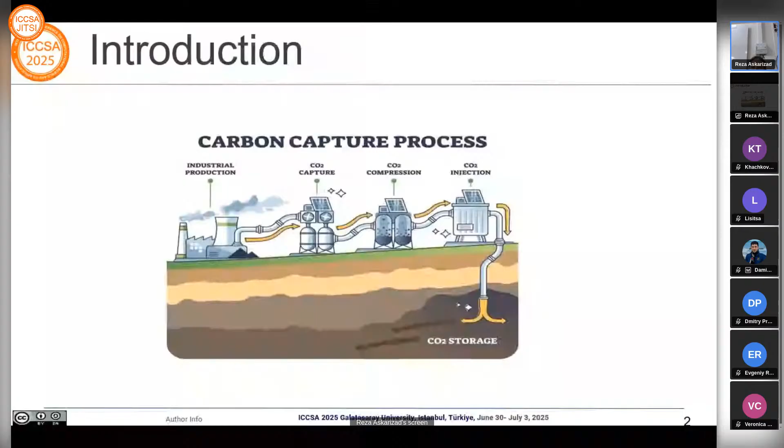...to reduce the CO2 we emit into the atmosphere. Once injected into the subsurface, it will lead to a series of physical responses. It will form a gas saturation plume, and physical properties such as density and seismic velocities change.

We need to monitor this process in order to ensure that injection is safe, to determine the initial pressure and location of the injection.

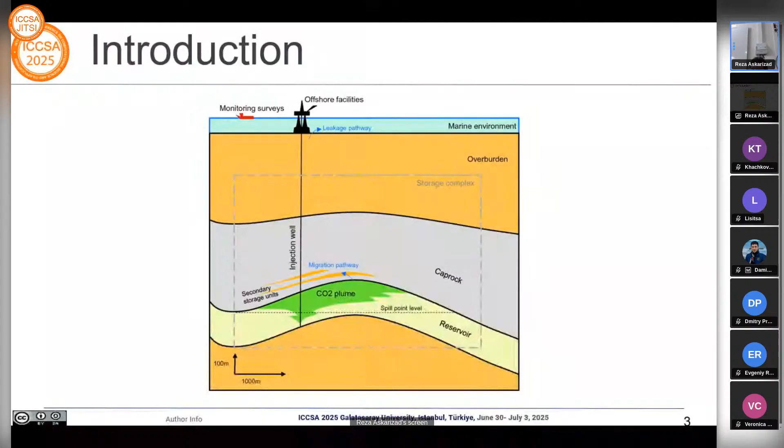Numerical simulations such as multi-phase flow in porous media and seismic modeling are the essential tools for solving the CO2 storage problem. This is necessary to predict storage capacity and assess the long-term risk arising from fault activation and well-bore leakage. However, it is very...

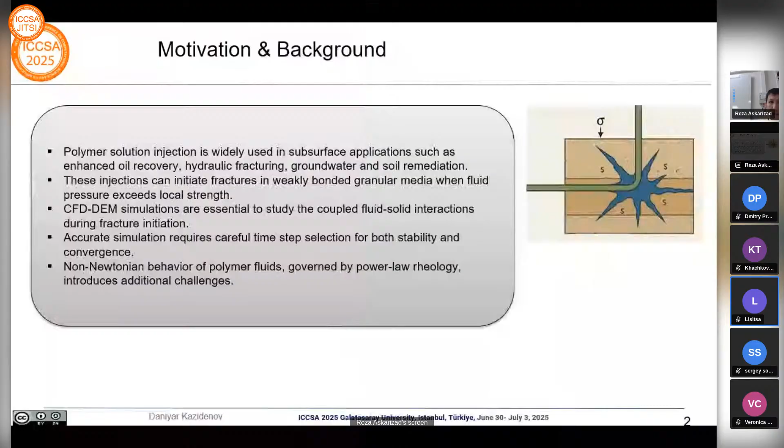This work is based on our previous study on fracture initiation, where we investigated the physical fracture initiation mechanisms.

Here, specifically, we focus on how power law parameters of non-Newtonian fluids affect fracture initiation and morphology, injection pressure evolution, and time step sensitivity.

First, I will describe the numerical model formulation, then show some numerical settings, present key results, and finalize with main conclusions.

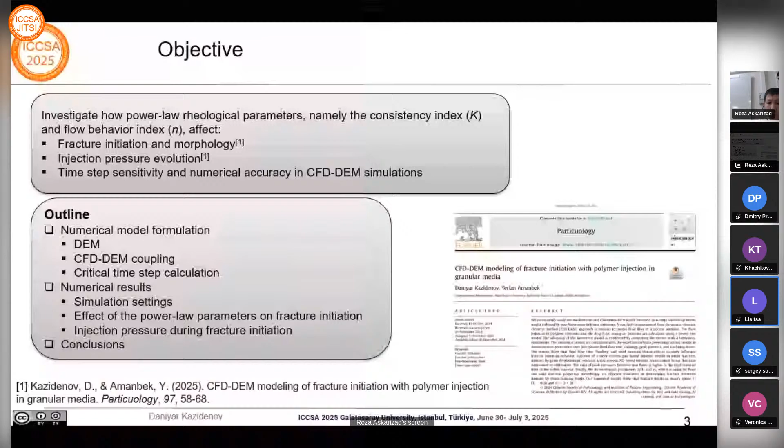In our study, we represent the rock formation as a porous granular medium containing many individual particles, and these particles are simulated using the discrete element method.

In the discrete element method, the motion of the particles is governed by Newton's second law, and the interaction between particles is described by the Johnson-Kendall-Roberts model for weak cohesive contact forces.

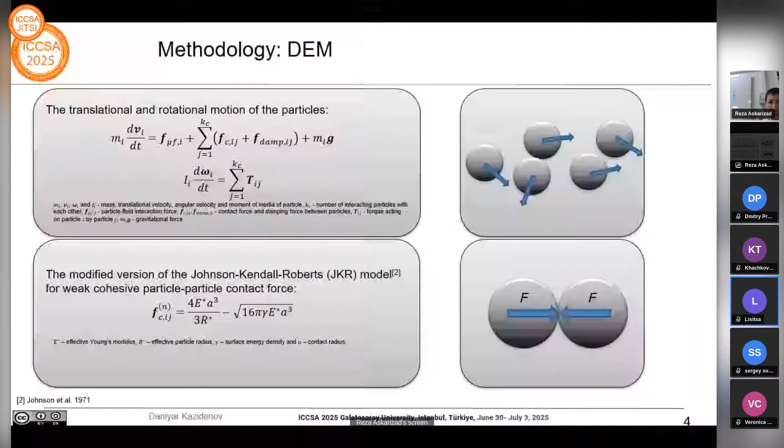Fluid flow in porous media is described by locally averaged Navier-Stokes equations. The total particle-fluid interaction force is the sum of all forces acting on a single particle from the surrounding fluid.

The dominant component of that interaction is a drag force, and that drag force is specifically adapted for power law non-Newtonian fluids in our study. Fanning friction and particle Reynolds number contain power law rheological parameters, which relate the fluid rheology to the momentum exchange with the particle.

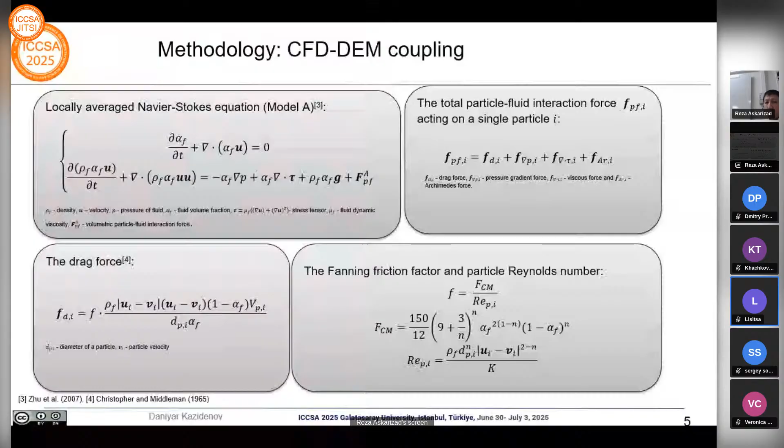In our study, we use separate methodologies to calculate the time step for the solid phase and fluid phase. In the solid phase, we use the Rayleigh time step criterion, which is based on material parameters of the solid particles. For the CFD time step, we use...

...the Courant-Friedrichs-Lewy (CFL) condition and diffusive time step criterion. The diffusive time step criterion is specifically for the creeping flow regime, where Reynolds numbers are much lower than laminar flow. Usually in CFD and DEM, the solvers operate at different time steps, and the coupling interval shows the ratio between those time steps.

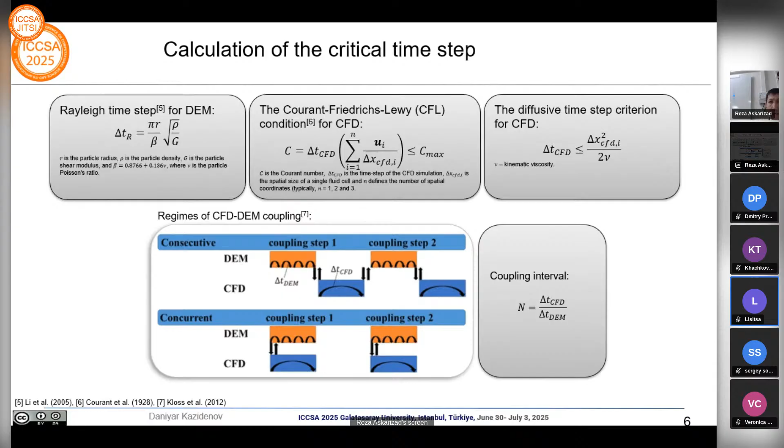The rheology of the injecting polymer solutions is described by the power law model, where the viscosity varies with shear rate, and is also influenced by the consistency index and flow behavior index. The consistency index shows the overall magnitude of the viscosity, and the flow behavior index shows how viscosity changes with shear rate.

For example, in Newtonian fluids like water, viscosity is constant, n equals 1 at any shear rate. When n is lower than 1, the regime is shear thinning behavior, and viscosity decreases with increasing shear rate, which is the objective of our study. When n is higher than 1, the regime is shear thickening, and viscosity increases with increasing shear rate.

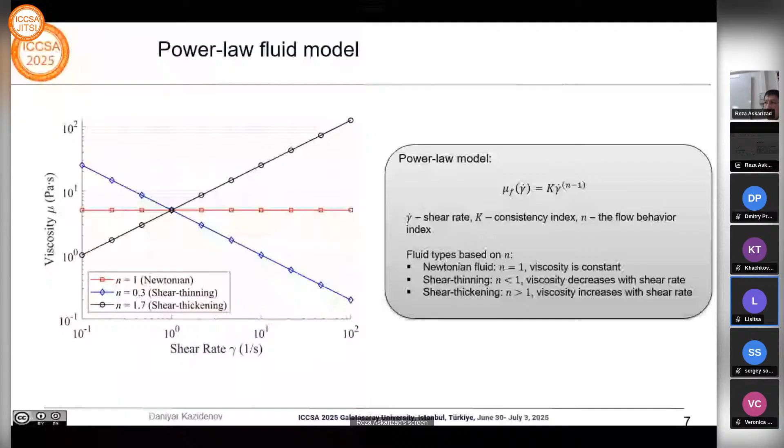Here we use 5 different consistency indices from 1 to 5, and each consistency index has 3 flow behavior indices, so total simulation cases are 15.

We use a total of 15 simulation cases, and the discrete element time step is the same for all cases, calculated based on the Rayleigh time step criterion. For analysis, we use 2 CFD time step cases, 10^-5 and 10^-4, with coupling numbers 1 and 10 respectively.

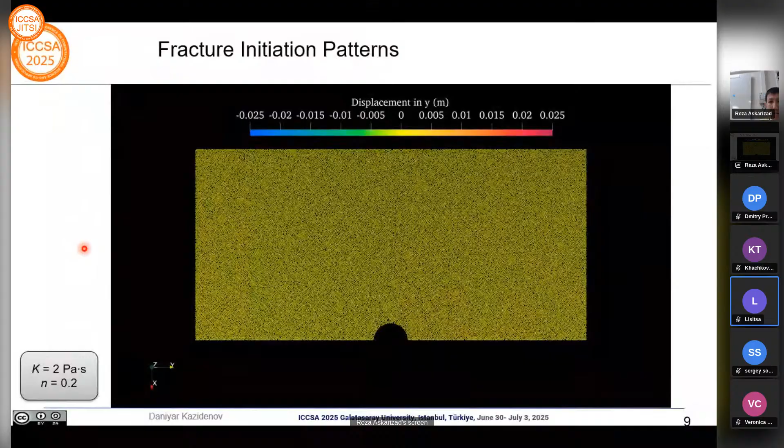This slide shows the snapshots of the fracture propagation cases, specifically the main fracture propagation cases.

At flow behavior index 0.2, consistency index 1 doesn't create any fracture, and fluid infiltrates into the surrounding medium here. At K of 2, there is a linear orientation of the fracture, which is perpendicular to the lower applied stress. K of 5 shows a radial pattern, which is independent of the stress.

When we increase the flow behavior index to 0.3, K1 shows two linear fractures, and K2 changes from linear to radial fracture, while K5 still remains in radial fracture, but with a larger fracture surface.

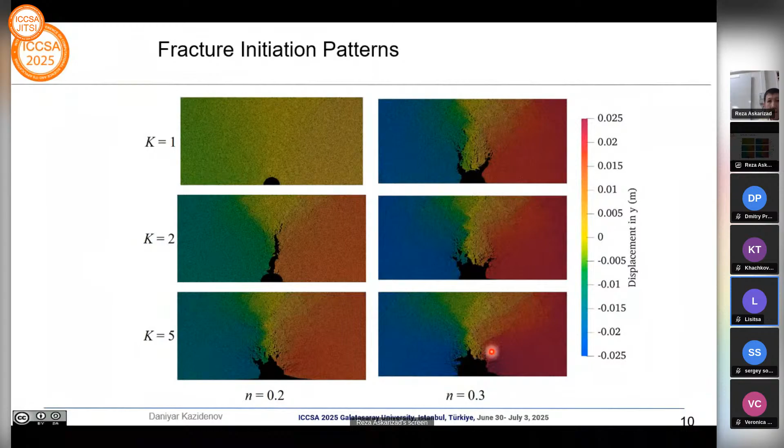At higher consistency index, velocity is lower within the fracture, and the fluid affects the particles uniformly and exceeds the stress applied from the sides, so the fracture behaves in a radial pattern.

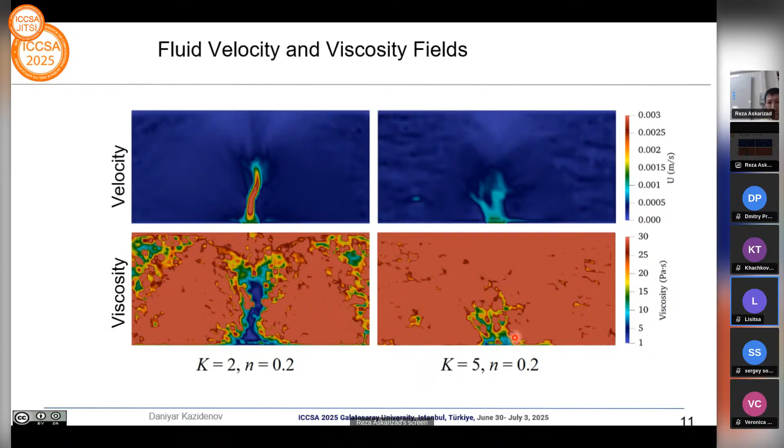For example, a rapid decrease in pressure corresponds to higher fracture opening, a gradual decrease corresponds to moderate opening, and stable pressure evolution with time indicates there is no fracture at all.

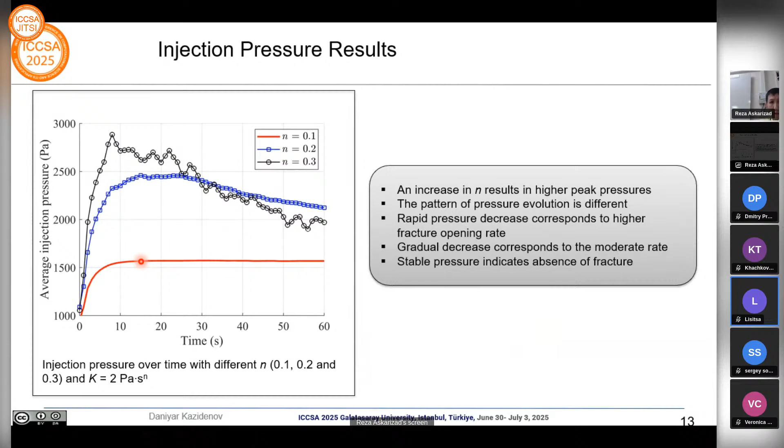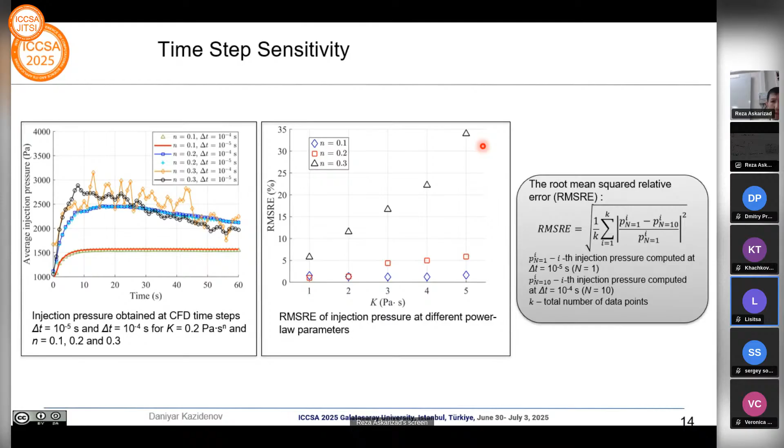Here are our main conclusions. Let's summarize: fracture morphology depends on fluid rheology.

Low viscosity leads to linear fractures, while high viscosity results in radial fractures. Flow behavior index has a stronger impact on time step sensitivity than consistency index.

Simulations with lower flow behavior index show accurate results even at higher time steps, but higher flow behavior indices require a smaller time step for reliable results.

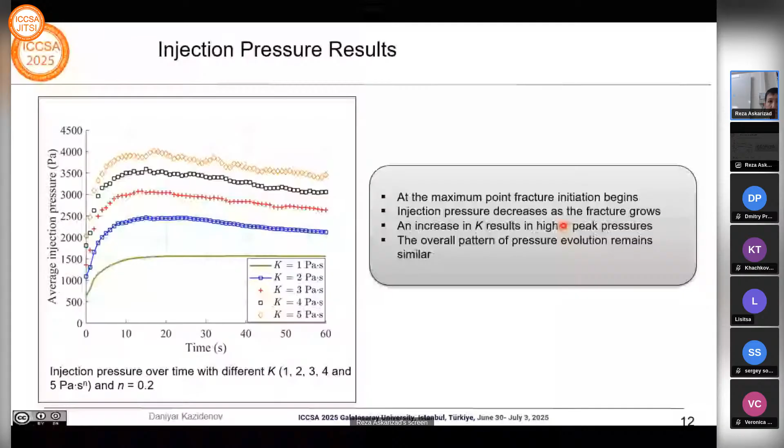Usually anisotropic stress conditions are applied. For example, if you apply the same boundary conditions, the fracture propagation is still radial even at lower consistency indexes, so we don't see the linear propagation. That's why we applied different conditions—we observe different stress conditions.

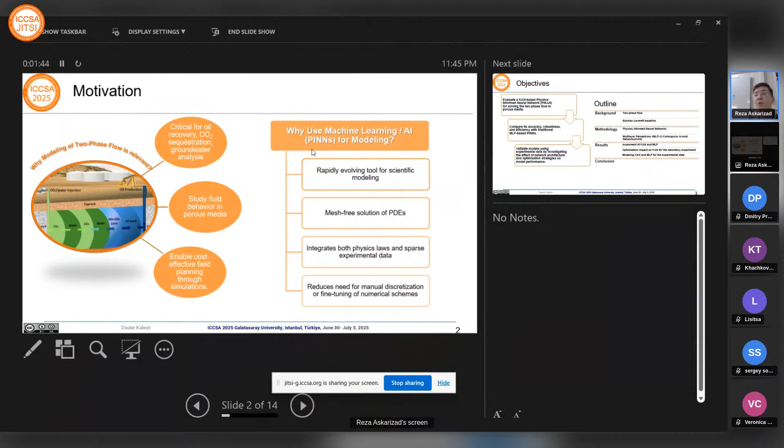That's where physics-informed neural networks, or PINNs, come in, offering a mesh-free and data-driven way to solve this kind of equation by enforcing the partial differential equations directly into the loss function of the neural network.

Our objective in this research is to explore the effectiveness of the newly introduced Kolmogorov-Arnold network within the PINNs framework to model two-phase flow in porous media. Specifically, we aim to solve the Buckley-Leverett equation using both the Kolmogorov-Arnold network and the MLP-based PINNs, and compare the performance of both architectures in terms of accuracy, training efficiency, and generalization.

To evaluate this, we use experimental data involving fluid dynamics. We also investigate how different architectures and training strategies affect the performance of our newly introduced network. Ultimately, our goal is to assess whether KAN is a more robust, interpretable alternative for modeling nonlinear partial differential equations in fluid dynamics.

Here's a short outline. We'll start with the background of two-phase flow and the Buckley-Leverett equation, then introduce our neural network architectures, examine the results, evaluate the performance of both models, and summarize our findings.

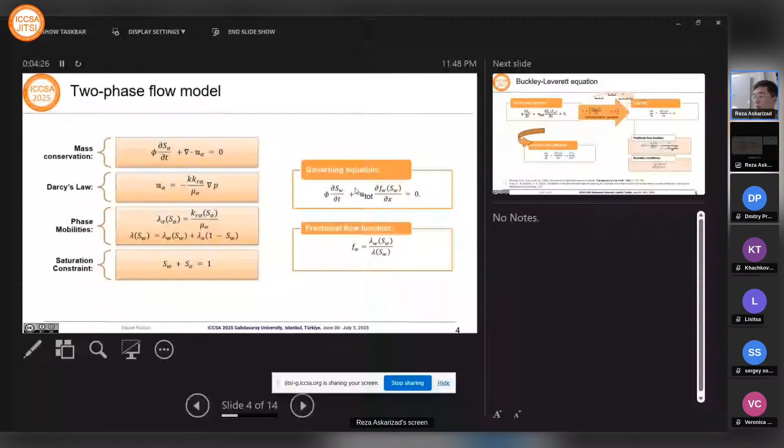For this Buckley-Leverett equation, we introduced dimensionless variables and made substitutions to normalize it and make it suitable for further analysis, with the fractional flow function in the non-convex case, since the non-convex case describes more complex fluid behavior. We applied the following boundary and initial conditions, and for the final PDE we incorporated a diffusion term, as proposed in prior studies by Olga Fuchs.

Next I'll introduce the neural network itself. The idea of physics-informed neural networks is that the network approximates our solution with trainable parameters under an enforced loss function consisting of two composite loss functions: the first ensures the neural network fits the data of the boundary and initial conditions, and the second enforces the partial differential equation itself.

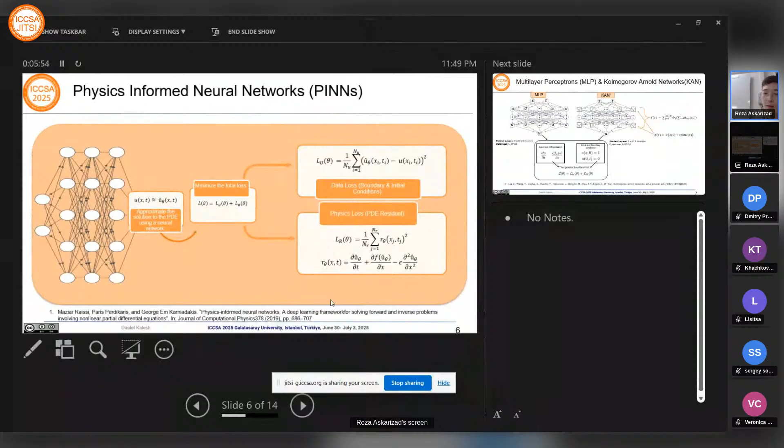This neural network was integrated with two different architectures. The first is the MLP, a standard fully connected feed-forward neural network. It is widely used and applies simple linear transformations with non-linear activation functions.

The second uses another principle, based on the Kolmogorov-Arnold representation theorem, fitting the data not through neurons but through splines. It uses activation functions that adjust the spline, the biases, and the weights. The difference is that the multi-layer perceptron uses fixed activation functions, while KAN uses learnable activation functions, which change over training.

We adjusted the following setups for both architectures, and here we present the results.

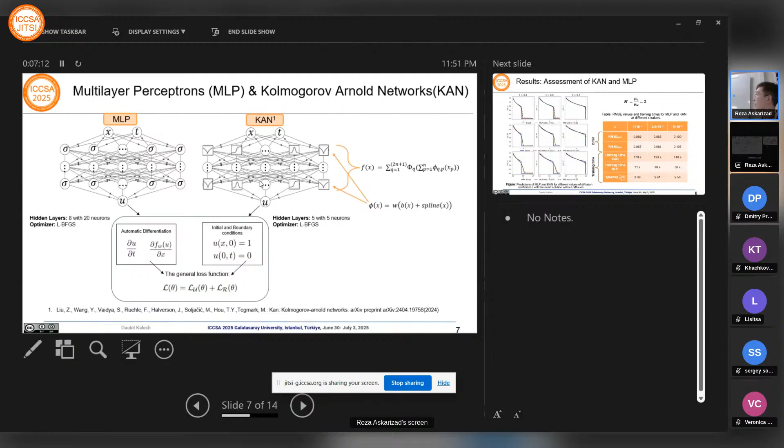To verify our models, we compared them with the analytical solution of the Buckley-Leverett equation. As you can see in the figures, both architectures closely match the exact solution. We also adjusted the mobility ratio of viscosities for this case, then numerically compared them using root mean square error as the metric, along with training time. The accuracies of both neural networks are similarly close; however, the training time shows that MLP is twice as fast as KAN.

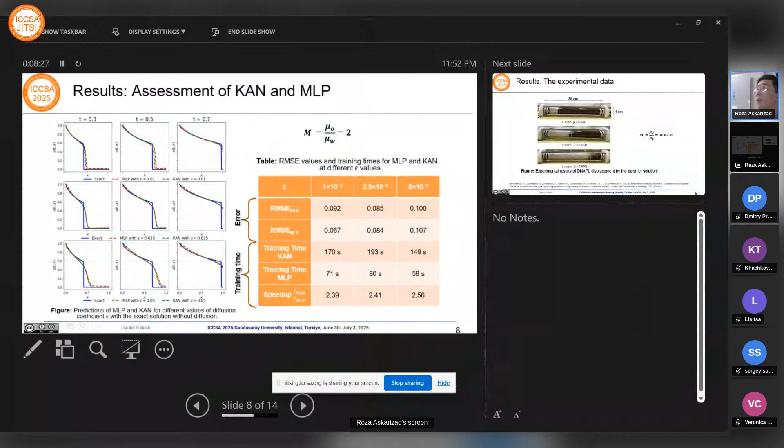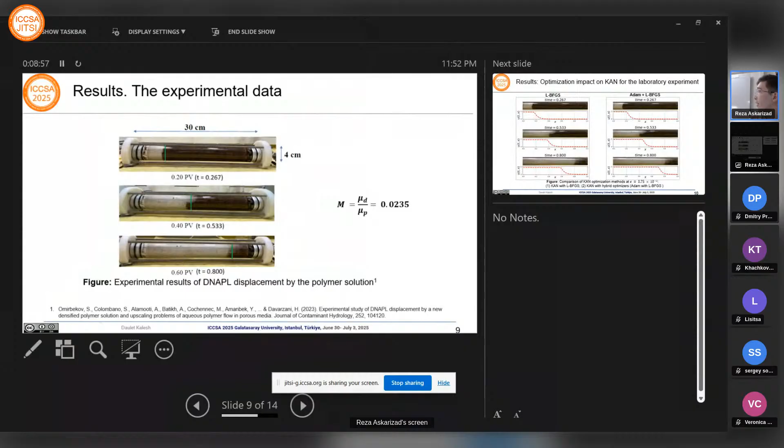In this slide you can see that we used the following validation to see how different optimization techniques impact the performance of our Kolmogorov-Arnold network. As you see, using only one optimizer fits perfectly for the first time step, but when we made the hybrid optimization strategy, it improves our prediction, closely matching for each case.

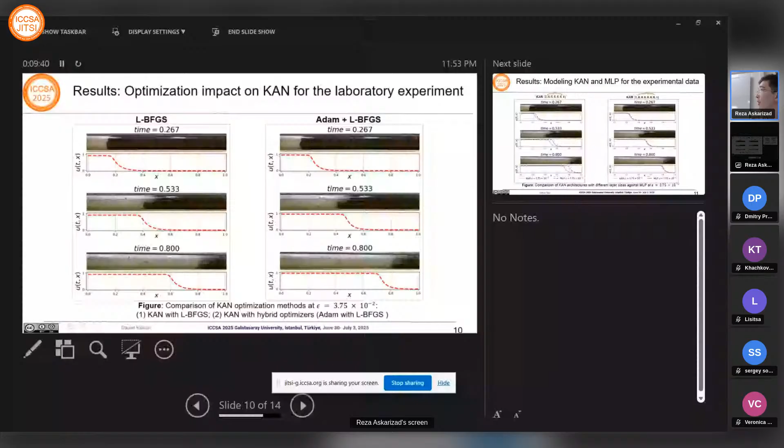So by using this hybrid optimization, we made the following analysis validation. We compared how the depth of the architecture impacts the performance of the KAN.

Even in this depth architecture, the neural network predicts well, but compared to MLP, it has a slightly bigger deviation. Then we added a new layer and increased the depth of the neurons in each layer. As you see, it perfectly matches all the results.

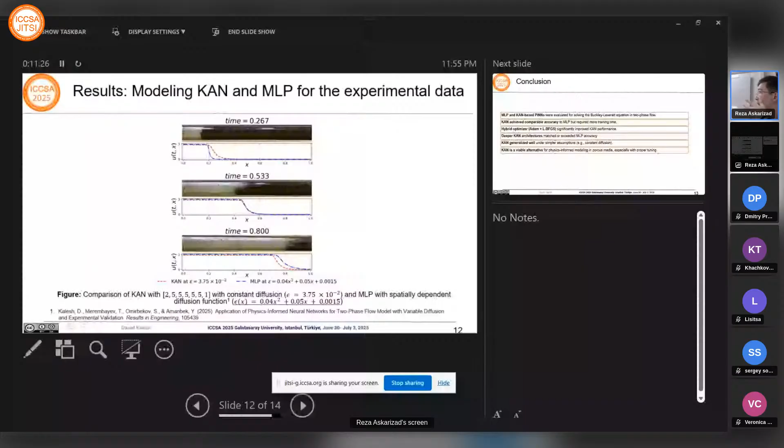To summarize, we evaluated the KAN model and performed it. We successfully implemented it for the two-phase flow model. As you see, KAN achieved comparable results, however it required more training time, and this hybrid optimization technique also improved our KAN performance. The deeper KAN architecture also improved and matched MLP's accuracy.

To sum up, we can say that KAN is a viable alternative to use for modeling two-phase flow in porous media. That's all, thank you for your attention. I'm happy to take any questions.

Thank you, we have time for questions. Are there any? Are you restoring the one-dimensional solution? Yes, yes. Okay, and how did you choose the function of relative permeability?

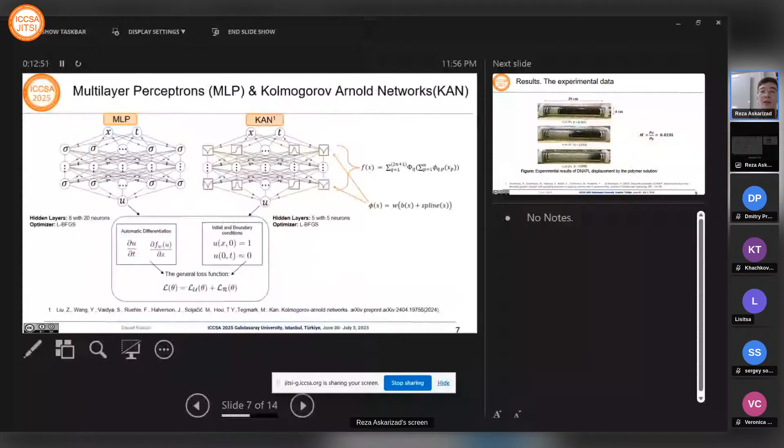Yes, I think he's solving the Buckley-Leverett, which has dimensions, so certain terms will cancel. But still, it's squared, so it's like... Any other questions? Non-convex. Any other questions from the audience, the online audience?

Okay. Okay, thank you. Thank you.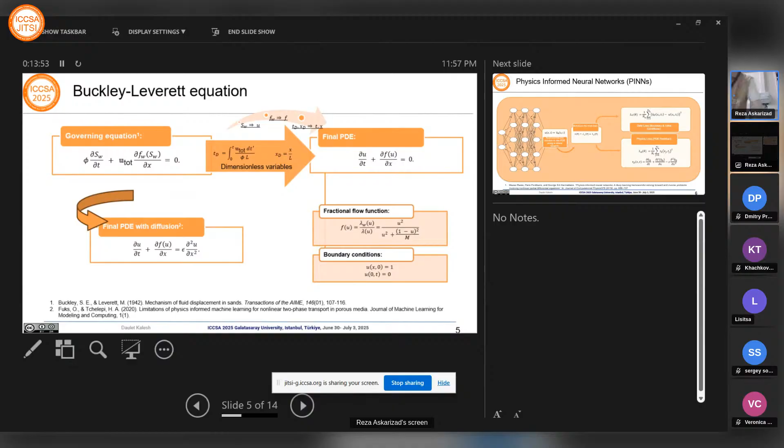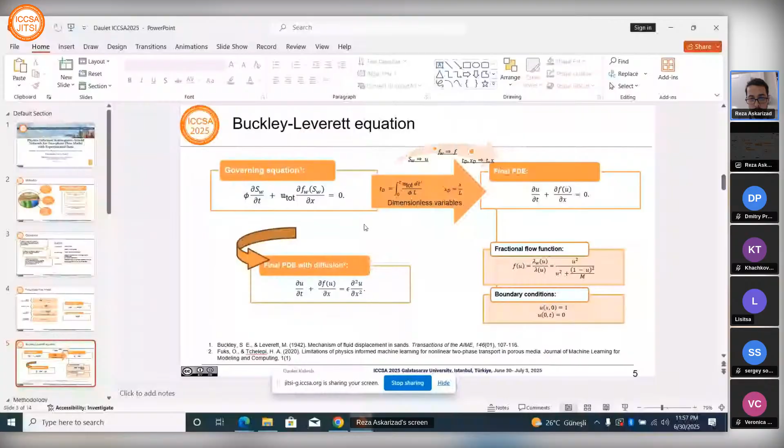So I think it's time to try, just to be sure that we'll see. Yeah, at least we can see the PowerPoint. Do you hear me? Yeah, we can see your full screen mode, so it works nicely.

Okay, so hello everyone. Today I'm going to tell you about multi-GPU implementation of the numerical algorithm enhancing discrete element modeling performance. First, let me briefly tell you about the type of problem to be solved.

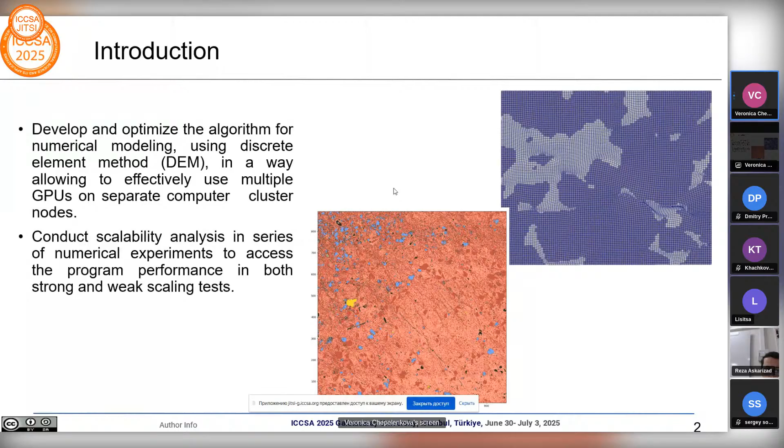But DEM simulations are computationally intensive, so our goal here was to develop an efficient algorithm based on using GPUs on distributed memory systems and to measure its performance in strong and weak scaling tests.

In DEM, the sample is regarded not as a continuous medium, but as a set of small particles interacting with elastic and friction forces, which can be represented as a system of springs connecting each two particles. To calculate the elastic force in normal direction, particles are allowed to overlap so that the difference between their initial and current overlap length is used in a Hooke's law as shown here.

The friction force is calculated using the incremental representation of relative tangential displacement. It should be noted that some particles are considered as bonded, and there exists a critical length which breaks the bond if exceeded.

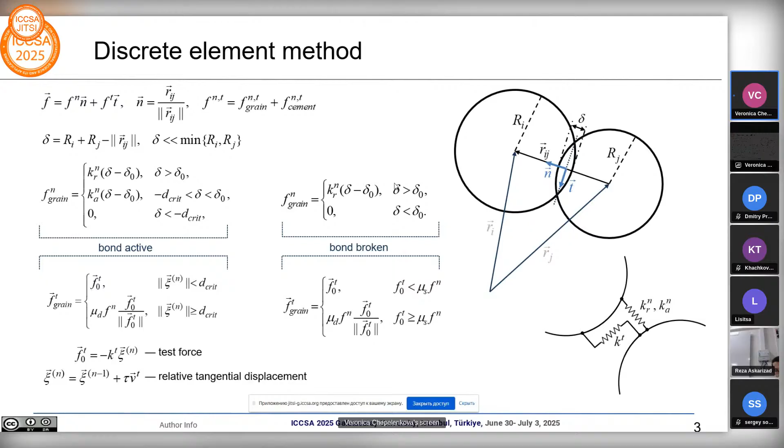So basically, we have Newtonian equations of motion for each particle, where the gravity force is neglected, and the interactive pairwise force is calculated among a specific subset of particles, J of I. To solve this equation, the velocity-Verlet finite difference scheme was used.

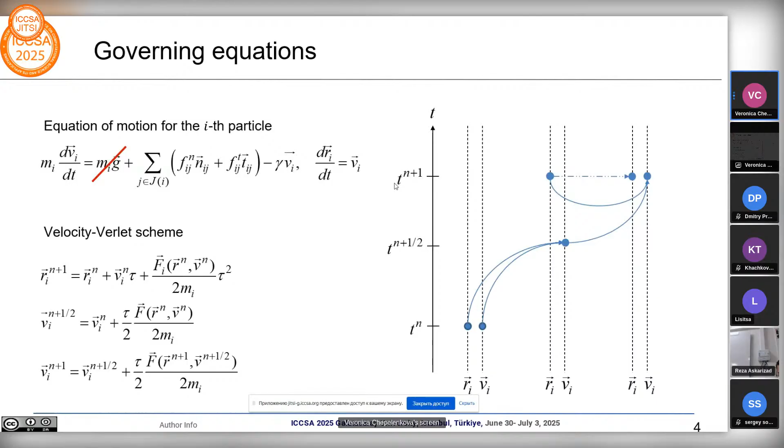Now, more on the subset of interacting particles. The most straightforward way to calculate forces of particle interaction is to sum up the forces for each possible pair of them, which sounds extremely inefficient and can be easily optimized knowing that most of the particles do not interact since they are too far from each other.

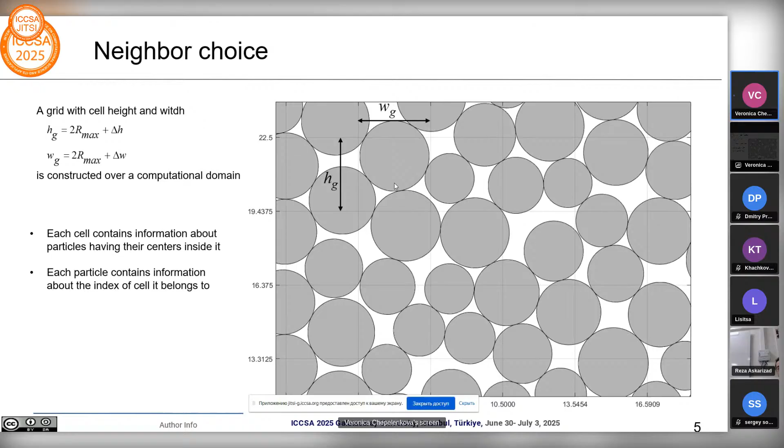To narrow down the area where forces are relevant, we construct a grid over a computational domain with its cell size chosen in such a way that at least one particle can fit into it. Now we assume that each cell knows about the particles lying inside it, and particles know the index of the cell they belong to. By doing that, we can define a subset of particles by picking all the ones inside 9 cells surrounding the particle of interest, including the cell it is lying at. This approach can significantly decrease the amount of interactions to be calculated.

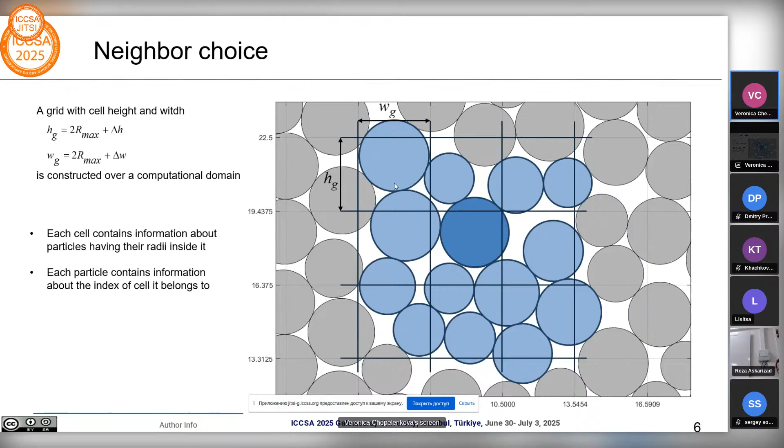Next, about bonded particles. Let's say a pair of particles is defined as bonded if, after a packing stage, they end up being overlapped. This is an important definition since bonded particles interact with each other not only in a repulsive but also in an attractive way, as if there was some kind of cemented material gluing them together.

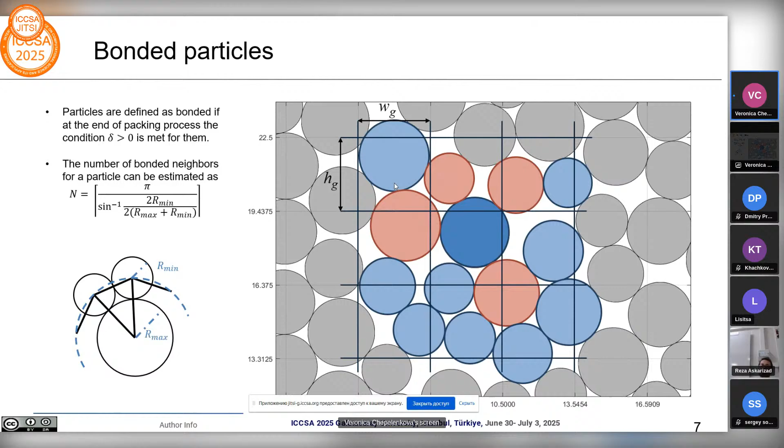Now for the packing stage. Here, the Poisson disk sampling algorithm is used to fill a given domain with uniformly distributed points, which are placed no closer than at a certain distance from each other. After that step, the radius within a given range is assigned to each point, and from now on, the Lubachevsky-Stillinger algorithm starts working.

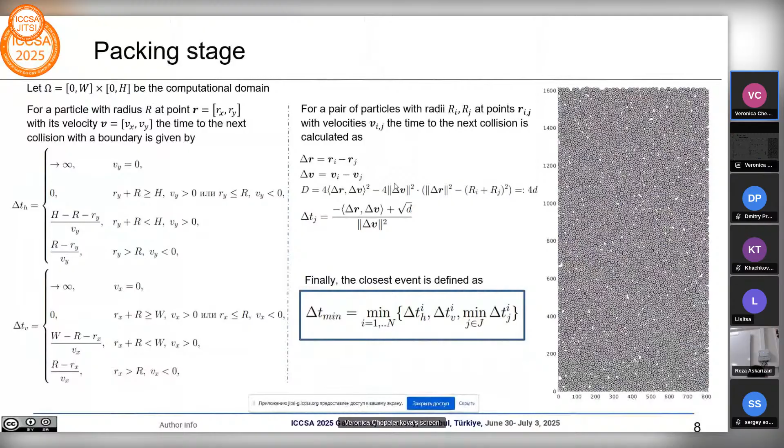The next and final stage is uniaxial loading, and here we apply a finite stress to the sample and measure its average stress and strain to use for calculating effective elastic properties.

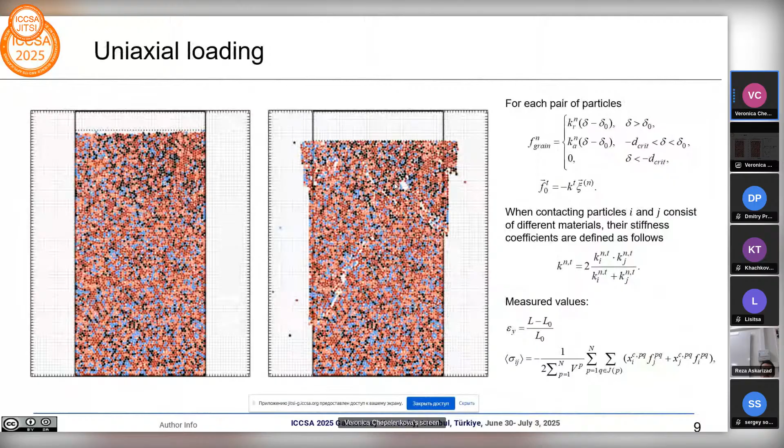And the core problem is how to pack the structure to correctly transfer it. Casting it directly to an array of bytes is incorrect, as we will send only pointers and not the underlying data, which means the data will be lost and pointers will be invalidated because they are moved to another memory space, which can be either VRAM or RAM of another cluster node.

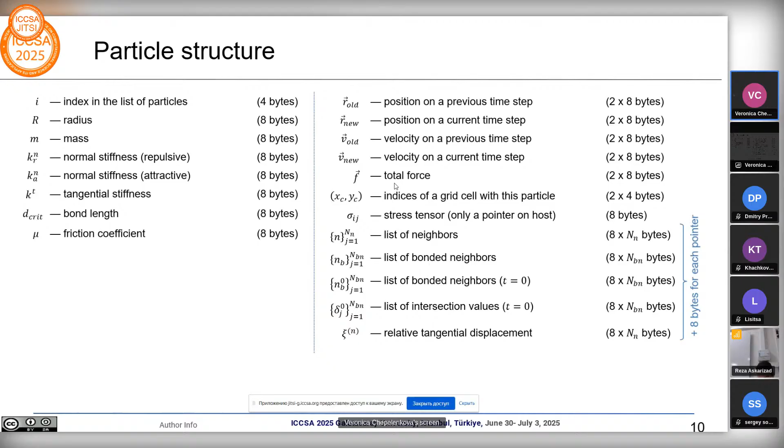Sending structure fields one by one will give correct results, but has extremely high computational cost, since calling transfer functions is an expensive operation and thus should be used as rarely as possible. So we've chosen to serialize data, meaning converting it to an array of bytes, not with general casting, but with placing inner arrays directly into a byte sequence to be sent.

The total list of particles can now be represented as a sequence of each particle's byte stream. The process of deserialization is performed in a similar way. This allows us to call a transfer function only once, thus reducing the computational cost.

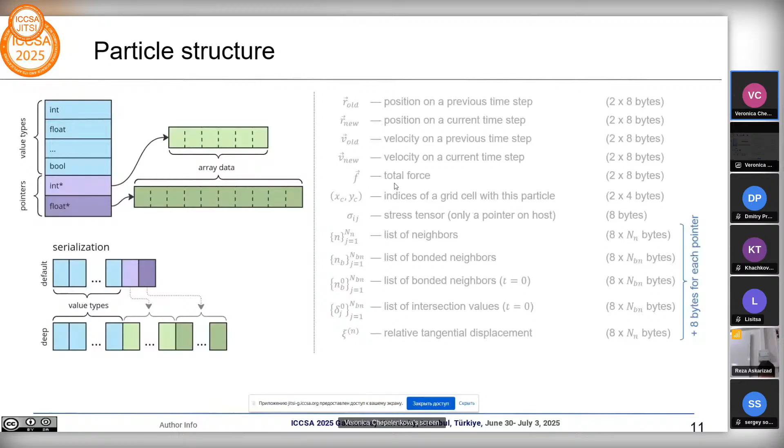So, to use our algorithm for distributed memory systems, we divide a computational domain into subdomains, each assigned to a corresponding MPI process. Since the trajectory of each particle depends on the others, we have to add so-called halo cells, which are cells received from an adjacent process at each time step.

The first situation is when the particle moves into the process and should from now on be handled by it. To do so, the process receives not only the particles in halo cells, but also the set of indices moved from an adjacent process to the one of interest. They are now added to the list of all particles in this process and assigned to a corresponding cell of the first or last row of the grid.

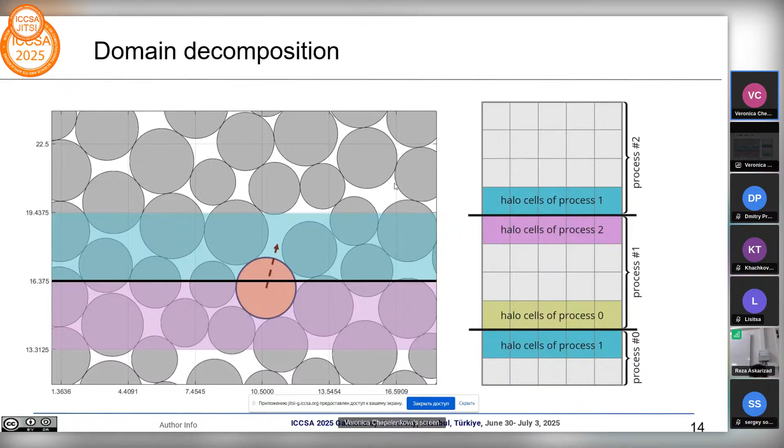Similarly, if the particle leaves the subdomain, the process sends the array containing particles in its first or last row, along with the array of indices of particles that should now be handled by another process. These particles should then be deleted from the list in this process so that calculations are not doubled. So the overall algorithm for each process at each time step is as follows.

First, we calculate new positions for particles in the first and/or last rows of the grid. Then we fill the arrays of indices of particles moved to another process. That gives us one array for each boundary, which is 1 or 2 in total.

Then we serialize data and perform data transfer from VRAM to RAM. Next, we send the first and/or last row of the grid to a corresponding process, and at the same time receive updated halo cells from the adjacent process.

Now, if there exist particles moved through the boundary, we send indices of particles moved to the other process and receive indices of particles moved from the other process. If there exist particles moved to the adjacent subdomain, we remove them from the list of particles in the current process. And if there exist particles moved into the current subdomain, we add them to the list of particles and set corresponding grid indices.

Now we transfer data back from RAM to VRAM and deserialize it. It is also worth noting that the block of exchanging data runs simultaneously with the basic calculations for the rest of the subdomain, thus hiding the time needed to perform preparations and transfers.

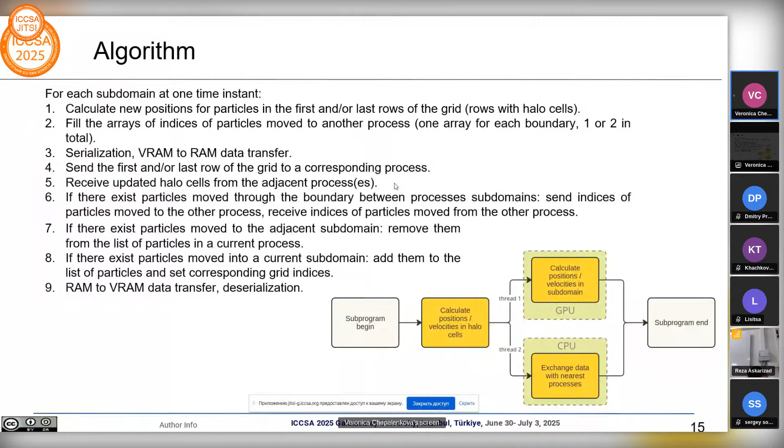Now for scalability analysis. Two types of tests were conducted to measure the performance of the algorithm. The first is the strong scaling test. Here we have a fixed domain containing 112,000 particles, distributed between 1, 2, 4, 8, and 16 processes. Efficiency is measured as the ratio of the time spent on one process to the time spent on n processes, divided by n.

The reason for this is the too small number of particles, since the more processes, the less calculations per process for the same amount of transferring.

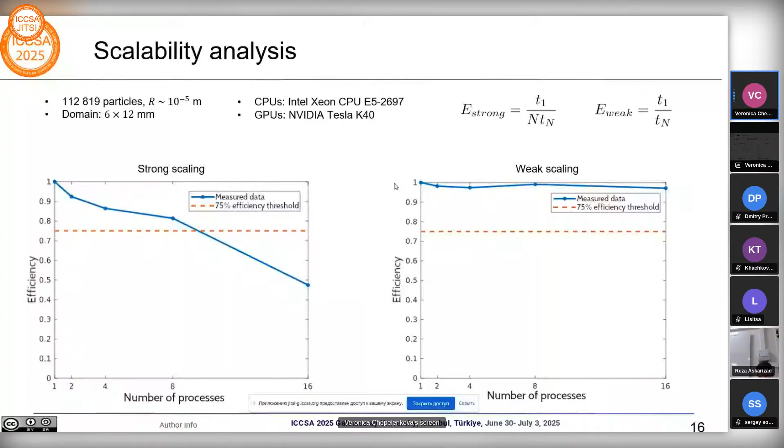To sum up all of the above, in this work we developed and implemented a numerical algorithm combining both CUDA and MPI for multi-GPU computations on multiple computer cluster nodes. This algorithm uses both GPU and CPU simultaneously to reduce the time of calculations. We also proposed a method to exchange information about particles moving through inter-process boundaries, and conducted numerical experiments for strong and weak scaling tests showing the efficiency of the implemented algorithm.

And that's all I wanted to say on this topic. Thanks for your attention.

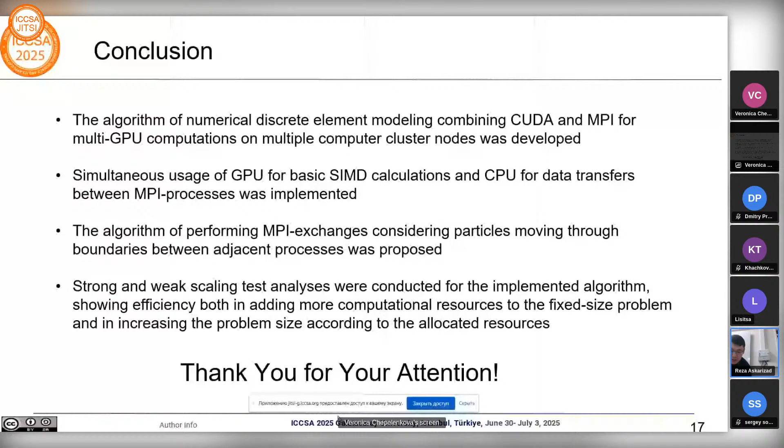Okay, thank you for your presentation. I was wondering, I saw this weak scaling part, it's hard to reach this. I was wondering about the speed up. Have you considered comparing CPU computation versus multi-GPU computation, like traditional CPU versus this new model with your CUDA implementation? Oh, I did not perform these tests.

Okay, so then another question is, hopefully it works faster, right? Yeah, sure.

Okay, I have some numerical questions. How do you deal with solving the unresolved discrete element method, which means in one cell you should have... you don't have this CFD, right? You have the purely...

That's good. And regarding this, you had this loading experimental work, right? Did you compare your CUDA implementation with the experimental results? We don't have any physical experiments on hand, so we've never compared it.

Okay, thank you. Okay, I think we can go to the next presentation. Okay, great.

My talk will be about solving the elastic problem by static simulation. This slide is about introduction: we want to solve the elastic problem in an inhomogeneous medium with not constant coefficient, the Lamé coefficient. To solve this, we use it in 2 dimensions. We use a rectangular mesh and finite difference approximation.

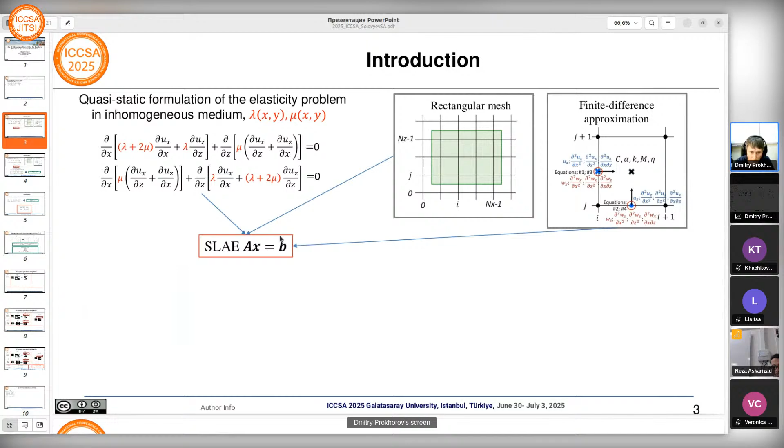How do we solve it? It's not a big problem. We use the conjugate gradient method, but the main issue is how to check, how to use the preconditioner - what preconditioner we should use.

In this work, we use the preconditioner A0 as the matrix from the elasticity problem in a homogeneous medium - the similar equation, but the coefficients are constant. In the next slide, we want to discuss how to solve this equation.

We use spectral decomposition to solve this equation. Why do we do it? Because we can use fast multiplications. We use spectral decomposition in 1D, and after that we construct the decomposition for 2D and use fast matrix multiplications to solve this problem very fast.

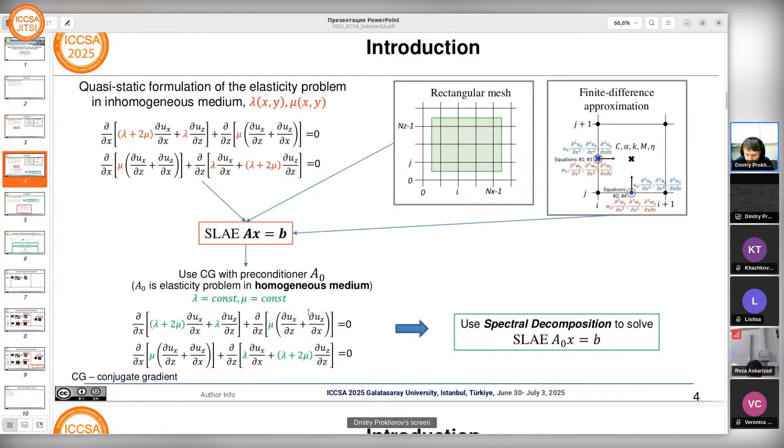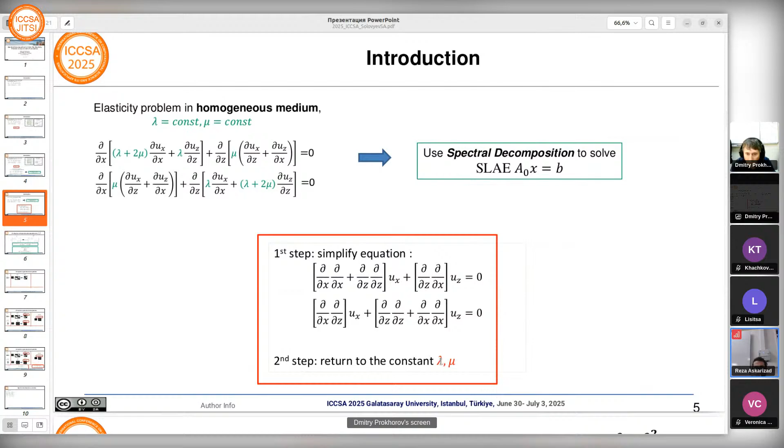Okay, the first step is to simplify these equations when we don't use the constants. The second step, we come back and return to the constants lambda and mu. We will start from the description of the first derivative, then move to the second, to the Laplace operator, and to the whole equation.

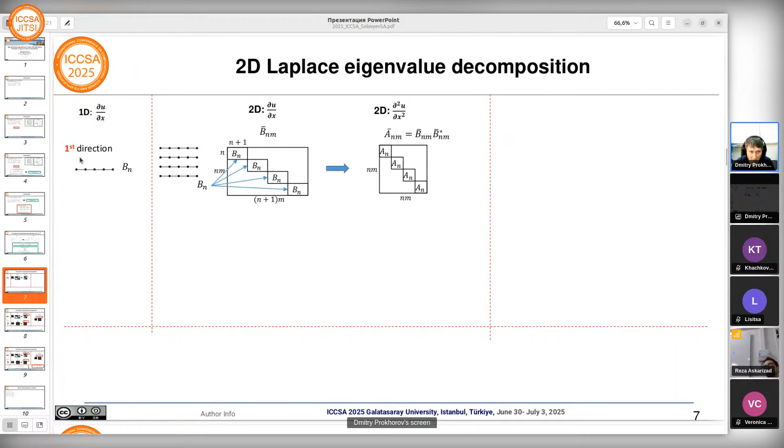Next step, we look at the second direction. The first derivative du by dz, and second by z2, and we can construct the Laplace operator from these two matrices.

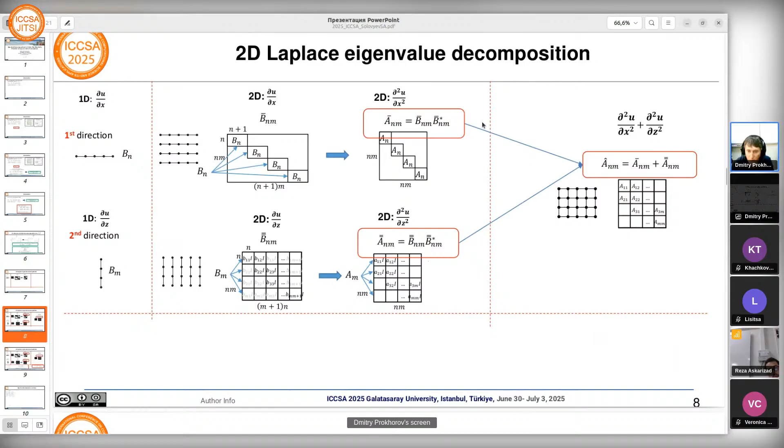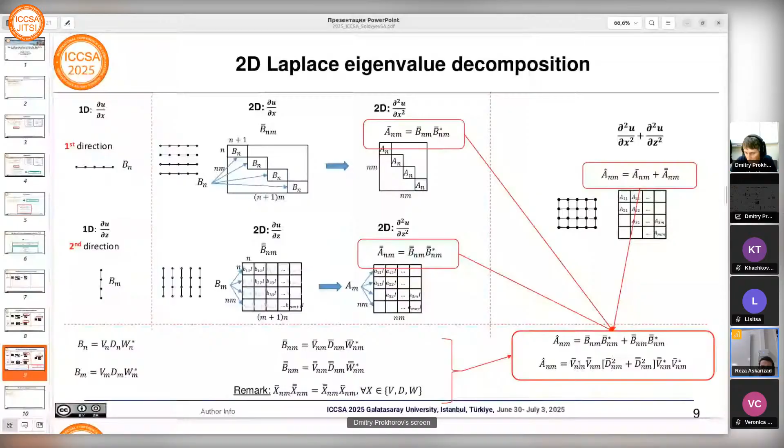Also we can use the SVD, singular value decomposition of matrix B from the previous slide, and so get the representation of matrix A hat for Laplace by the product of some matrices: V single line, V double line, and diagonal matrices D. So if our problem is the Laplace operator, we can inverse this matrix very fast, because matrices V are orthogonal and D are diagonal.

Anyway, for each operator we can write the matrices presented on previous slides, B single line, B double line, and also we can replace these matrices by singular value decompositions, like here, this by this and this by this. So we can represent our operator by matrices with orthogonal matrices V, diagonal matrices D, orthogonal matrices W, and diagonal matrices D.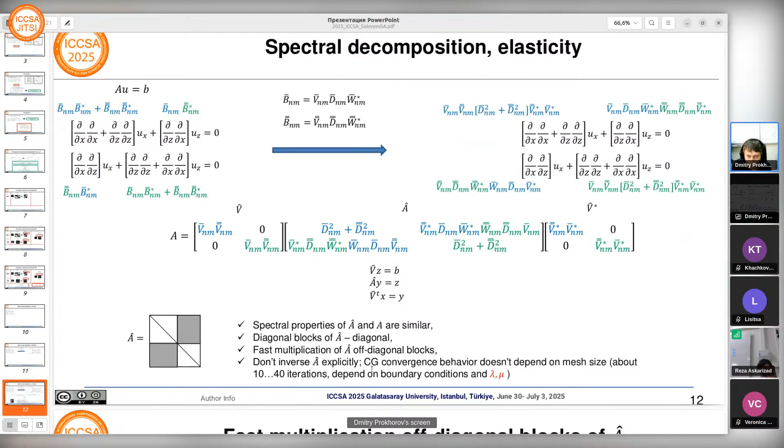This slide is about how to fast get the product of any matrix V single line by vector U. Any matrix V single line, W single line, A contain diagonal blocks, the same diagonal blocks. So we can replace the product of V by U by the product of the diagonal block V by any matrix U, where each column of matrix U is part of vector U, and the result matrix V, where each column of matrix V is a part of vector V.

As a result, we replace the left computation, the product of matrix by vector, by the right product of small dense matrix by small dense matrix. It's very good because in our program we use the GEMM functionality of the BLAS library, and this GEMM functionality is very highly optimized for computational resources for any method.

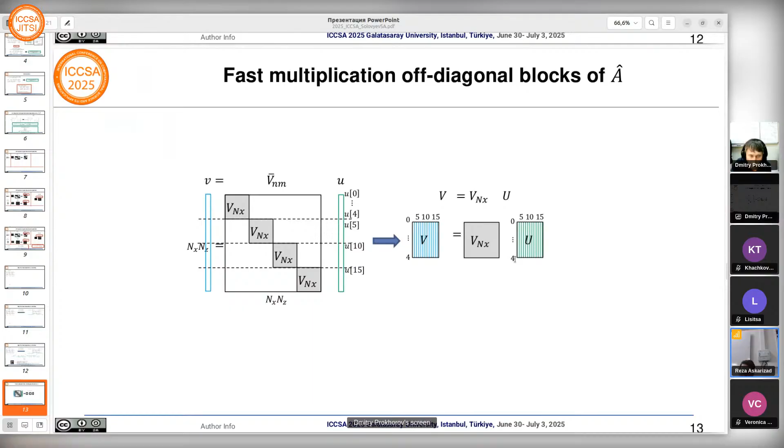And based on this fast multiplication, we can construct the fast product of matrix A hat by any vector, because diagonal blocks are diagonal, and off-diagonal blocks can be multiplied by some vector through the sequential product of each matrix V, D, and W using the GEMM operation.

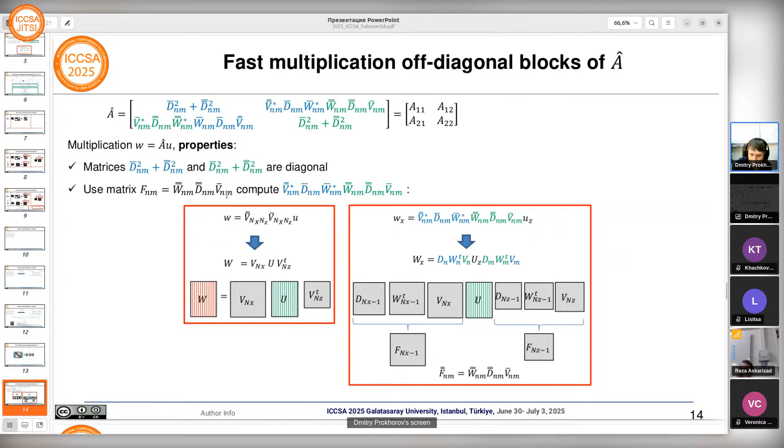Okay. As a result, we construct from the initial AU equal B this system with V hat, A single line, and others. So we solve this using the algorithm.

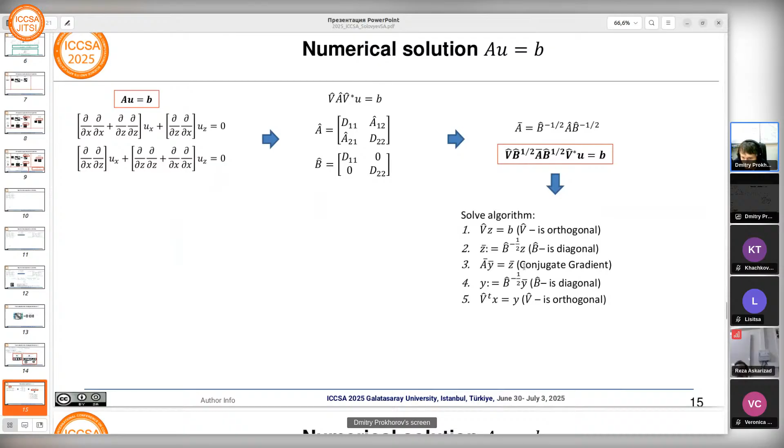Algorithms can consist of 5 steps, and the third point is the most hard, because we should invert the matrix A single line. And to do it, we use the conjugate gradient algorithm, and we need just 10, maybe maximum 40 iterations to converge this conjugate gradient algorithm.

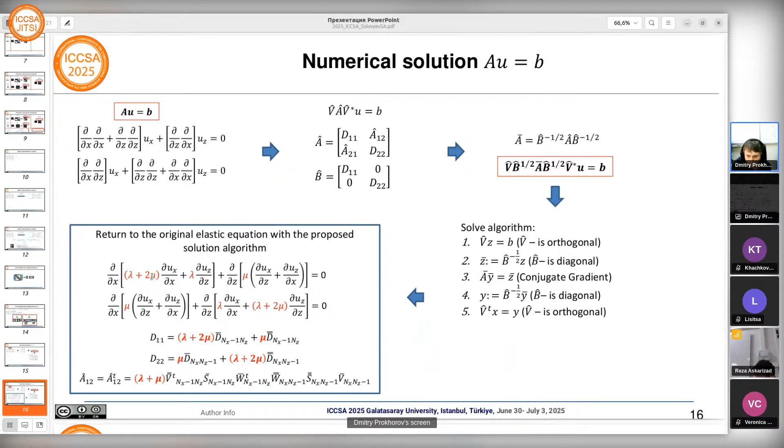After that, we come back to the original system with the coefficients lambda and mu, and use the same algorithm. Our numerical experiments we perform on this cluster with 256 gigabyte RAM.

The first experiment, we want to know what's the largest system we can solve by our approach. The large system is about 1 billion nodes of meshes, so it's 2 billion unknowns of the system of linear equations, and it depends on boundary condition and depends on contrast of coefficients. The solution time is not more than 4 hours for this system.

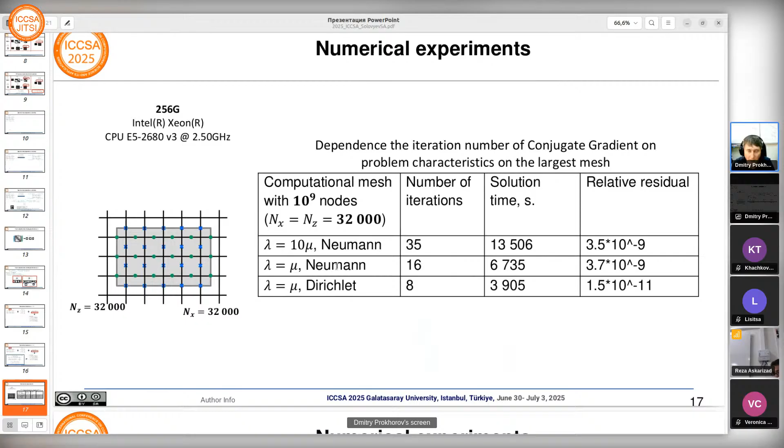At the final slide, we want to compare our iterative solver with spectral decomposition against some direct solver from the MKL library, the mathematical kernel library. Of course, the memory consumption of our solver is much less than the direct solver. For solving 1 billion mesh nodes, it doesn't need 256 gigabyte RAM, it's enough with 128 gigabyte RAM.

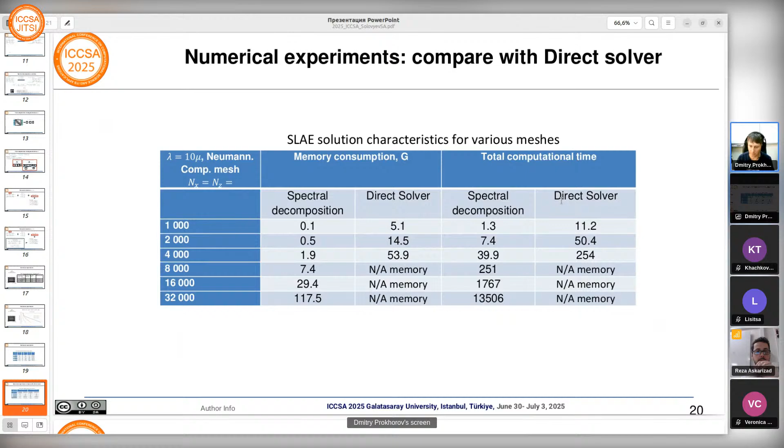So our conclusion is that we developed a very fast algorithm. We can solve a very big problem, the elasticity problem, with constant coefficients, and this algorithm can be used as a preconditioner for the elasticity problem with inhomogeneous medium, with non-constant coefficients. Thank you for your attention.